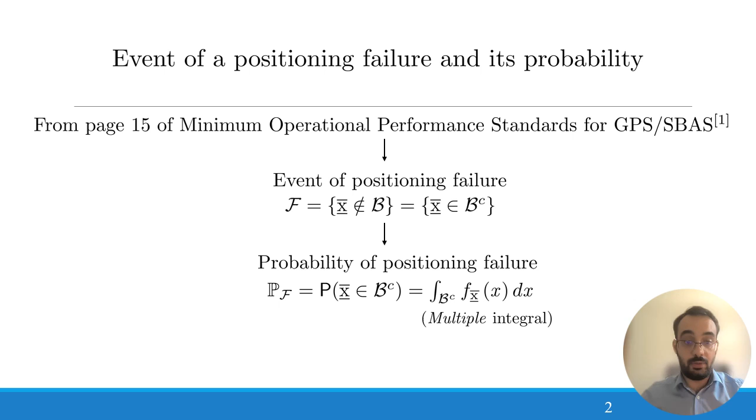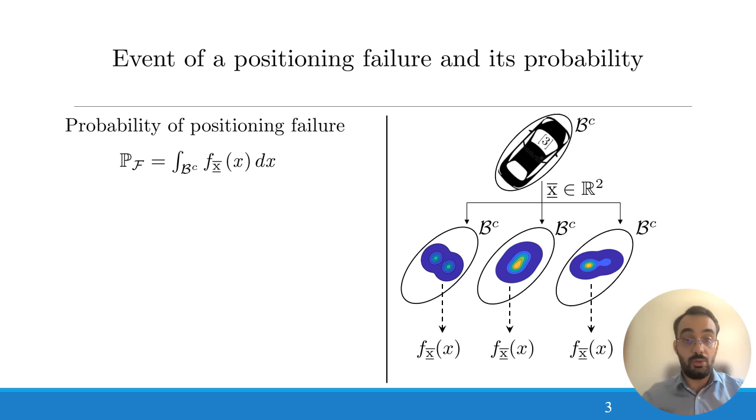On the right side, we have an illustration showing what shapes the PDF of the position estimator could have in practice. If we relate the PDFs with a chosen shape of the safety region, we observe that each of the PDF contributes differently to the probability of positioning failure.

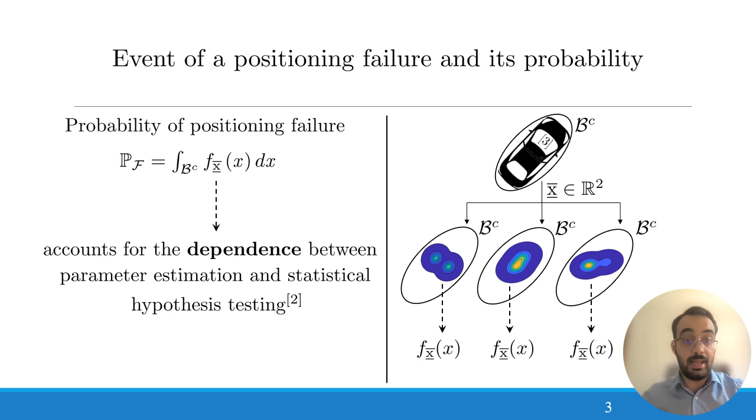Although the PDFs are clearly non-normal, they are actually capturing the dependence between two statistical inference concepts often used in positioning algorithms, such as parameter estimation and statistical hypothesis testing procedures for model misspecifications such as outliers or faults in the measurements that are used for positioning. Today's discussion will cover the principles of this dependence, which should be accounted for, especially in the context of positioning safety analysis. Neglecting this dependence may lead to unrepresentative results.

Therefore, we are going to cover three main points. The first one is about the principles of what we call the detection, identification, and adaptation estimator and its PDF. This is related to the aforementioned dependence. The second one is about the probability of positioning failure and its components. And lastly, a GNSS-based positioning safety analysis for an automated vehicle to illustrate the presented principles.

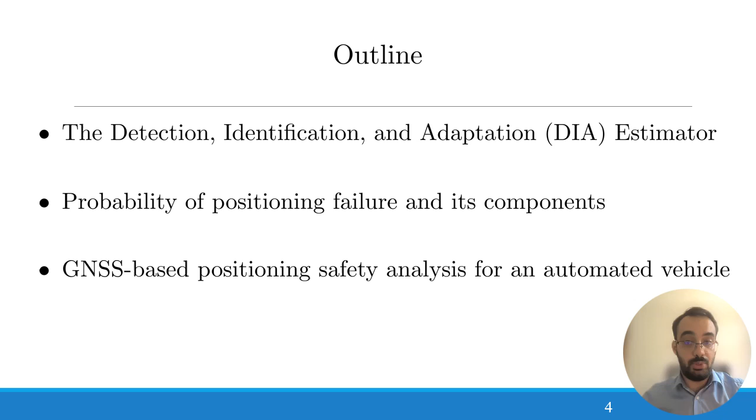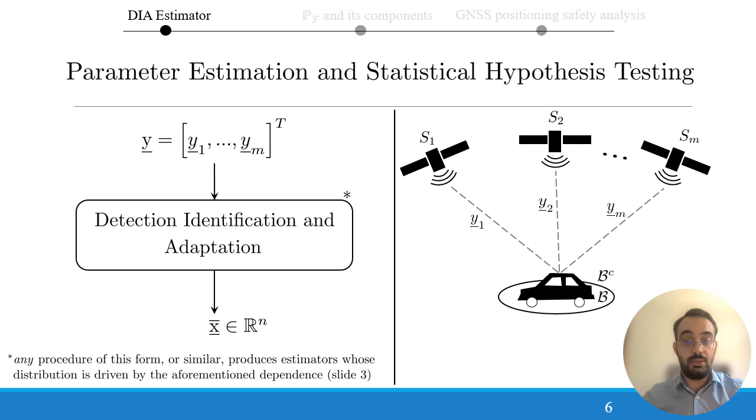We formulate the multiple hypothesis testing problem to account for the underparameterization of the mean of the observation vector. A is the design matrix and X is the to be estimated parameter vector, such as the position vector. Under the null hypothesis, we obtain the estimator based on the nominal functional model.

In practice, outliers or faults occur, so we need to account for this by extending the functional model. In the extended models, under the alternative hypothesis, the CI matrix represents the signature of the outliers or faults, which can be single or multiple. And BI is the size of these outliers under each of the hypotheses. We have k such alternative hypotheses, each with an associated estimator. A question arises. What should the decision rule be for selecting the most likely hypothesis and therefore the associated estimator?

For now, let's use an analogy involving levers. We accept H0 if the green lever is in the left setting and provide x hat 0 as output. If the green lever is in the right setting, we reject H0. However, this does not indicate which of the alternative hypotheses HI is most likely. To identify the most likely alternative hypothesis, we consider the one for which the blue lever is in the left setting. In this case, x hat i is provided as an output.

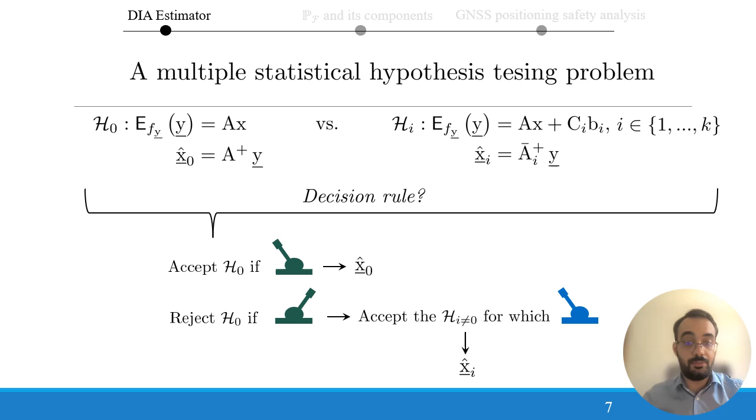To strengthen this intuition, we illustrate the outcome of the lever analogy with the help of an example. Let us assume that H1 is true. Now let's see what could be a probable outcome at the end of the procedure given the decisions based on the setting of the levers by following the red dot. H0 is accepted, so the green lever is in the left position. In this case, a misdetection occurs and the estimator under H0 is provided as an output.

Now we can ask the following question. Are there any other probable outcomes? The answer is yes.

A different probable outcome could be when H0 is rejected and the wrong identification occurs. In this situation, the estimator under H3 is provided as an output.

Another different probable outcome could be when H0 is rejected and the correct identification occurs. Now the estimator under H1 is provided as an output.

In this particular example, it would be incorrect to consider only x hat 1 and its PDF for safety analysis, without taking into account the other probable outcomes that could happen under H1.

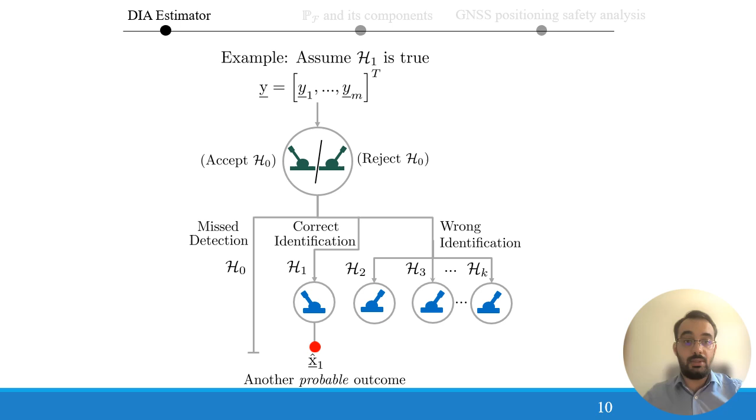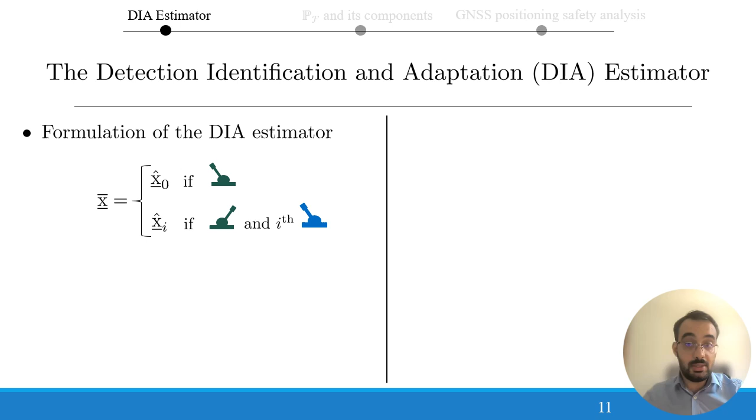What should we do then, given that considering only the individual estimators at the output of the DIA procedure is incorrect? We need to formulate an estimator which captures the effect of the decisions as an outcome of the settings of the levers. This is the DIA estimator. Its PDF accounts for the dependence between parameter estimation and statistical hypothesis testing.

But now one may ask, well, okay, but what exactly are these levers and what governs their setting? The test statistics are the levers, which are constructed based on the misclosure vectors, while the setting of the lever is governed by where the misclosure vector lands in its partition vector space, denoted with calligraphic V's.

The main idea is that we can map the multiple statistical hypothesis testing problem as a partitioning problem of the vector space of the misclosures. For example, if the misclosure vector lands in partition 1, then we select H1 as the most likely hypothesis and provide x hat 1 as an output.

These partitions are also needed to construct the PDF of the DIA estimator, as we need to integrate over them. For more details, we refer to our paper on how to obtain the misclosure vector and how to formulate the partitions via several examples.

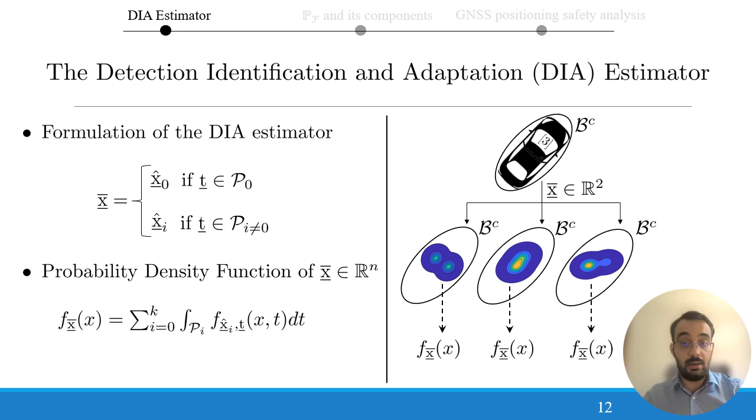Hopefully, by this point, we have developed some intuition for the DIA estimator and understanding about what its PDF must account for. The next step is to discuss the probability of positioning failure with particular emphasis on its components.

We have made a small change in notation of the probability of positioning failure. The bolded B represents a set that contains the sizes of the model outliers under all alternative hypotheses.

Now, how should we proceed with the decomposition? Since we are dealing with multiple hypotheses, we can apply the rule of total probability to obtain the following result. We have obtained the components under each hypothesis weighted by the a priori probabilities of occurrence of the hypothesis. This can be useful for investigating the components at a per hypothesis level.

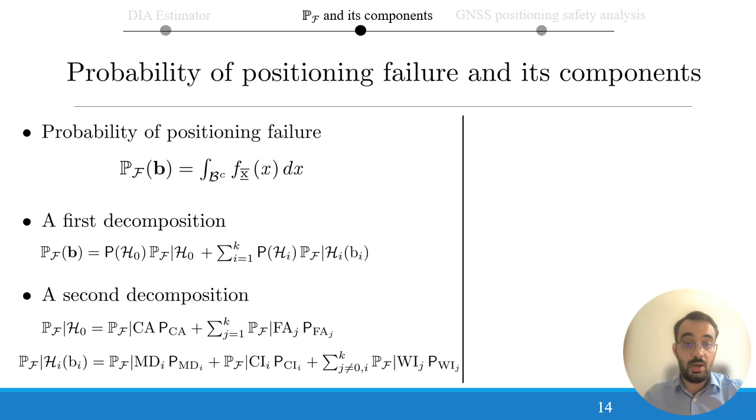We can go a step further and apply a second decomposition to the components under H0 and HI. Doing so, we have access to the conditional components related to the statistical hypothesis testing decisions such as correct acceptance, false alarm, misdetection, correct identification, and wrong identification. There is a legend on the right regarding the events or testing decisions under H0 and HI.

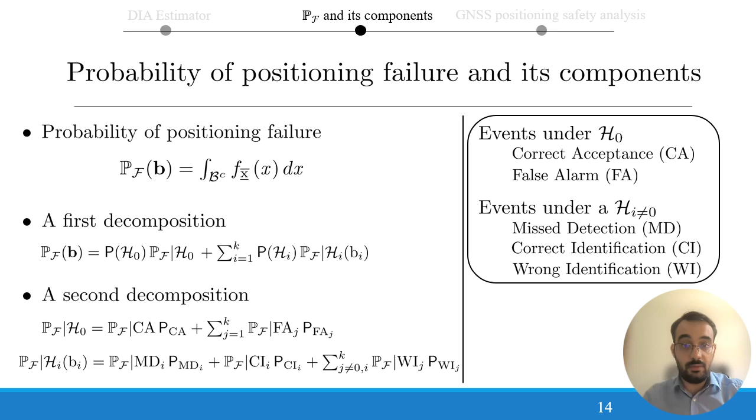We can arrange the result of the decomposition in a graph for a better visualization. In this illustration, we see the branch corresponding to the null hypothesis. Similarly for hypothesis 1 until hypothesis K. Now that we have a complete picture of these components of the probability of positioning failure, you might wonder,

What should we do with it? Our answer is simple: build it from the ground up.

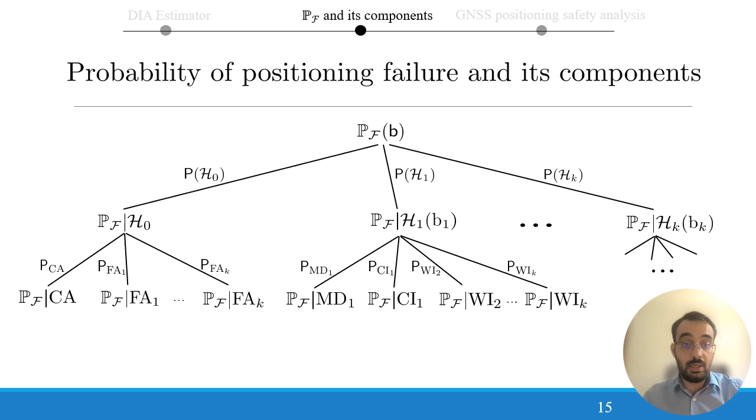And that's exactly what we'll do in the context of a GNSS-based positioning safety analysis for an automated vehicle. We selected the dual constellation setup utilizing GPS and Galileo and a differential GNSS positioning model to achieve decimeter level accuracy. Our goal in this scenario was a 95% two-dimensional circular error probable of half a meter.

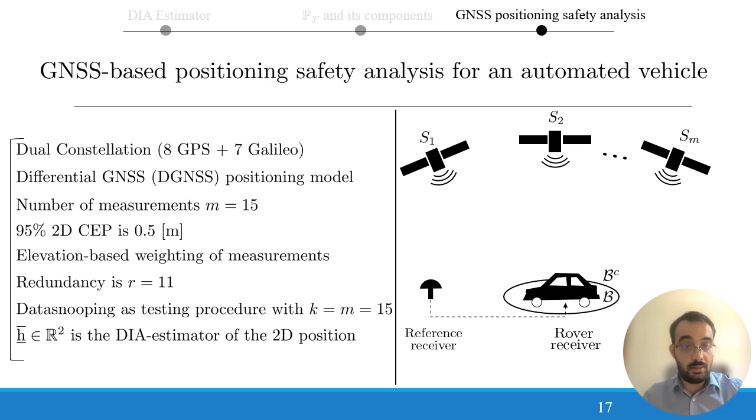The redundancy is 11 and the testing procedure is data snooping, so we assume only one model outlier at a time. In this case, we have 15 alternative hypotheses. Our focus is on the horizontal position, with the DIA estimator being denoted here with H bar. If needed, the 3D position can also be selected.

On the left, we have the satellite sky plot showing 8 GPS satellites and 7 Galileo satellites. They are depicted as alternative hypotheses. On the right, the dimensions of the car are shown, along with an elliptical safety region. Other shapes, such as rectangle, can also be chosen.

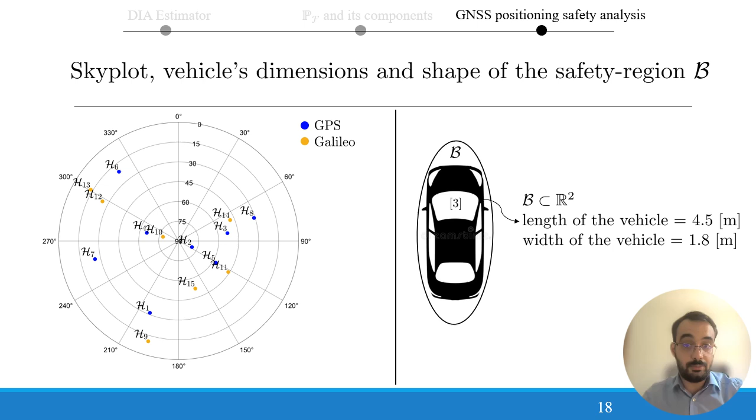Next, we are going to look at what the PDF of the two-dimensional DIA estimator looks like under an alternative hypothesis. As an example, we have the conditional PDFs under hypothesis 10. For a given size of the model outlier, this is how the conditional PDFs look like under the events of misdetection (MD), wrong identification (WI), and correct identification (CI).

If we relate the shape, size, and orientation of these conditional PDFs with a safety region around the vehicle, we can clearly see that some components will have more probability density outside the safety region than others. In other words, some statistical testing decisions will hurt more than others.

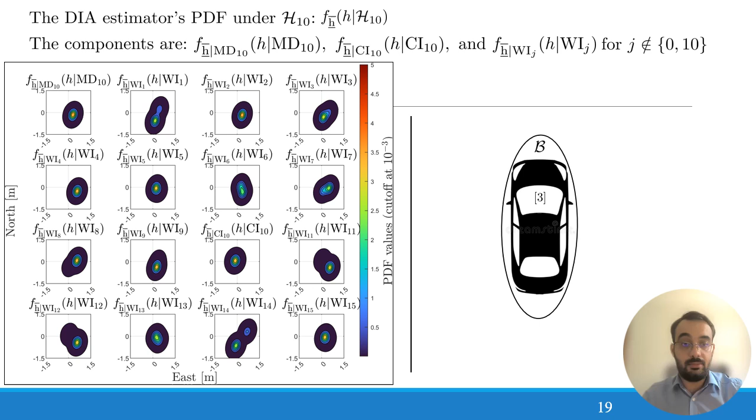Earlier, we said that we would like to build this graph from the ground up. As an example, we show the results corresponding to the branch of hypothesis 10.

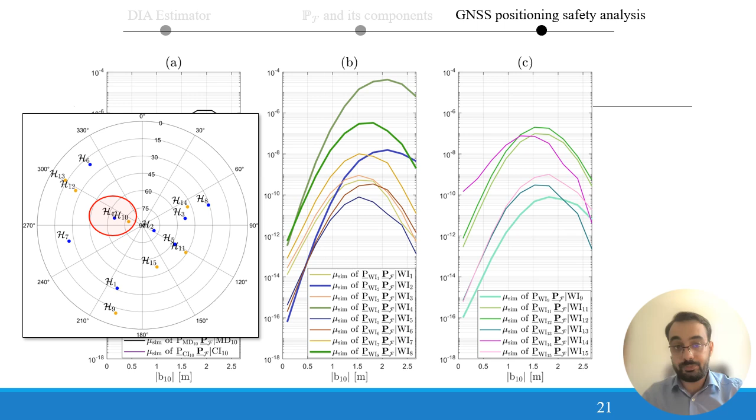By summing these components, we obtain the probability of positioning failure under H10. Similarly, this is done for all the other hypotheses, which we are going to see in the next slide.

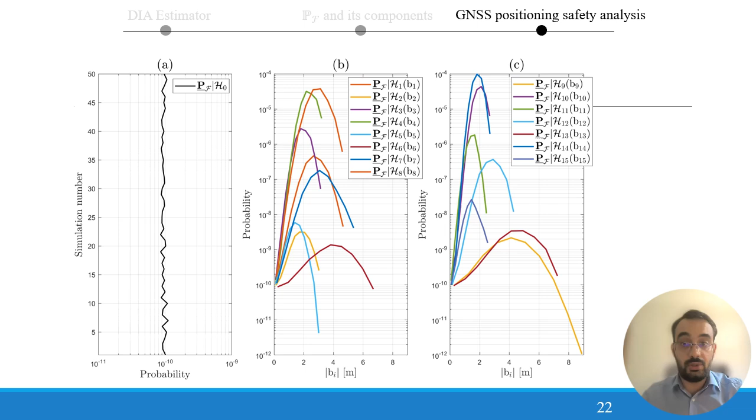These three graphs show the full picture on the probabilities of positioning failure under each of the hypotheses. We observe that the components under hypothesis 4 and 8 from the graph in the middle are the dominant ones, while the components under 10 and 14 are the dominant ones in the graph on the right.

The PDFs of the DIA estimator under each of these hypotheses, H4, H8, H10, and H14, have the largest variations of their probability density on the east direction, which for the chosen shape of the safety region will lead to the largest probabilities.

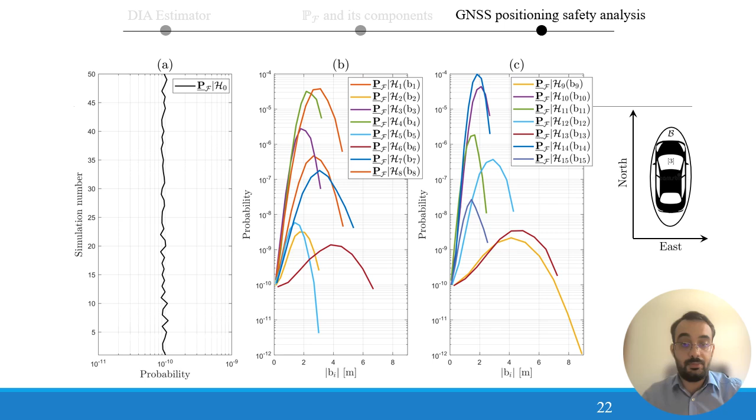We have constructed a graph up until the components under each of the hypotheses. In the next step, we will make some assumptions on the a priori probabilities of occurrence of the hypothesis to obtain the total probability of positioning failure.

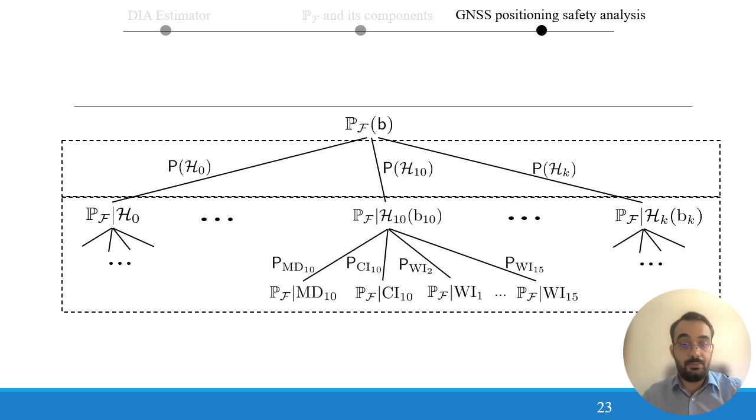We selected three cases, ranging from conservative to more optimistic scenarios. In case 1, we assume that an outlier occurs with a probability of 10-3 per satellite. In case 2, we assume that an outlier occurs with a probability of 10-4 per satellite. And in case 3, we assume that an outlier occurs with a probability of 10-5 per satellite.

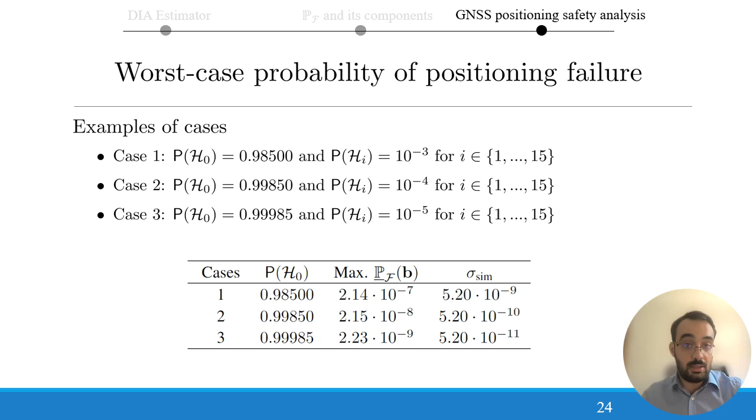Using these assumptions and the previous results, we obtain the following table with the maximum probability of positioning failure for each of the three cases. We see that the maximum varies across the cases from 10-7 to 10-9.

We can use the maximum values as key safety indicators to verify compliance with respect to requirements, if we have them. These results correspond to a single time instant, or snapshot.

For example, if the vehicle changes its orientation, then the results from the table will also change. We refer to the paper for the results related to the maximum probability of positioning failure as a function of the vehicle's orientation.

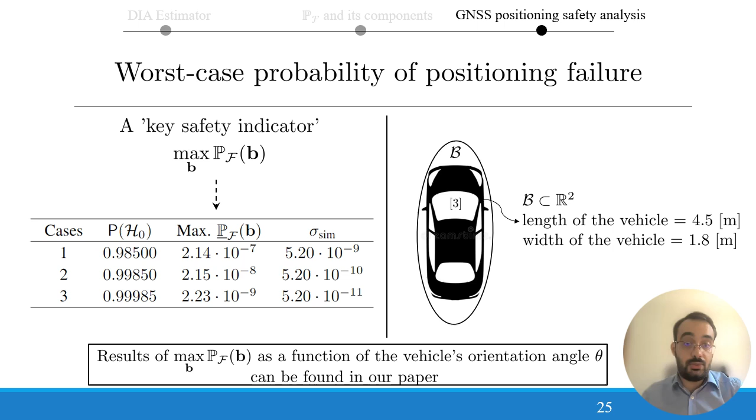At this stage, we can address a practical question. In what context would positioning safety analysis based on the probability of positioning failure be applicable? For this type of analysis, we rely on numerical simulation methods to compute the multiple integrals.

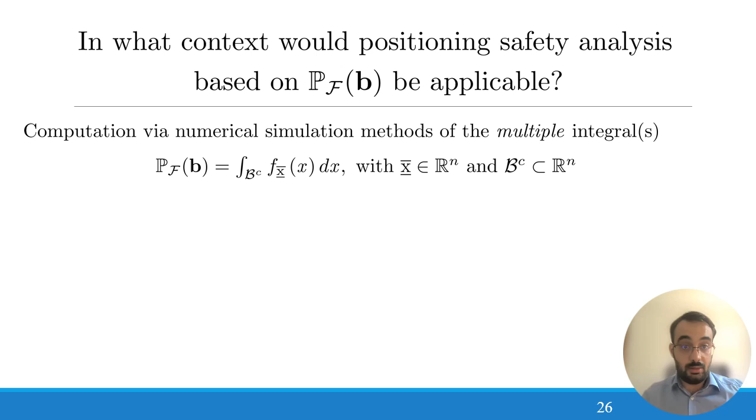Using numerical simulation methods aligns with a scenario-based safety assessment framework that is commonly used for automated and autonomous vehicle safety studies. For example, this applies to perception, planning, and control functions.

But where does such a framework fit within our context, particularly from a positioning perspective? A potential fit would be in the design stage of the positioning algorithms and our system. Let us see how this would work in practice.

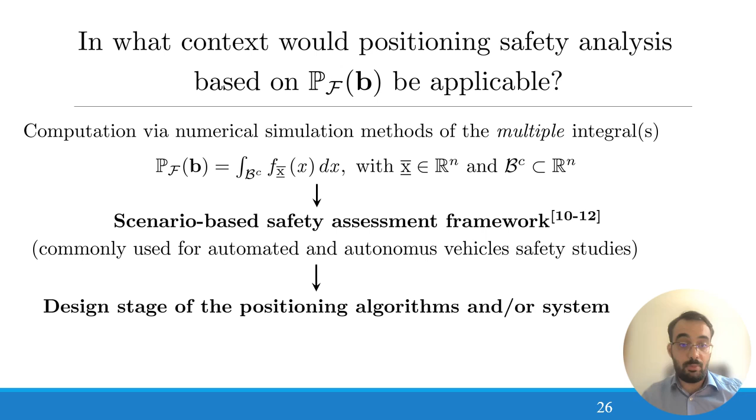In the design stage, we make choices regarding measurement models, parameter estimation algorithms, statistical hypothesis testing procedures, positioning scenarios for vehicles, etc. Based on these choices, we carry out the positioning safety analysis by computing the probability of positioning failure.

If compliance with respect to the requirements is not achieved, then we go back to the design stage. Once we achieve compliance, the resulting algorithms can be implemented for real-time positioning.

Of course, in this simulation-based framework, the results also depend on the scenario. For example, if we demonstrate that we achieve compliance in the context of a scenario, it does not mean it will be true for different scenarios.

But this can be good news because it opens connections with the safety studies for other functions of an automated vehicle, such as perception, planning, and control, which use a scenario-based approach.

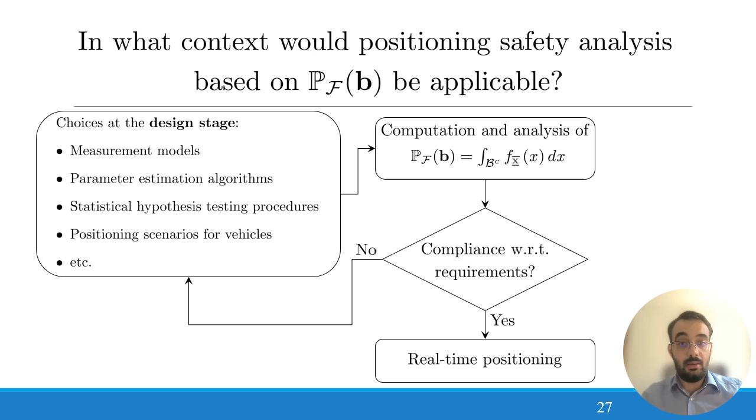In today's talk, we have presented the formulation of the probability of positioning failure, the principles of the dependence between parameter estimation and statistical hypothesis testing via the DIA estimator and its PDF, and carried out a GNSS-based positioning safety analysis using the discussed principles.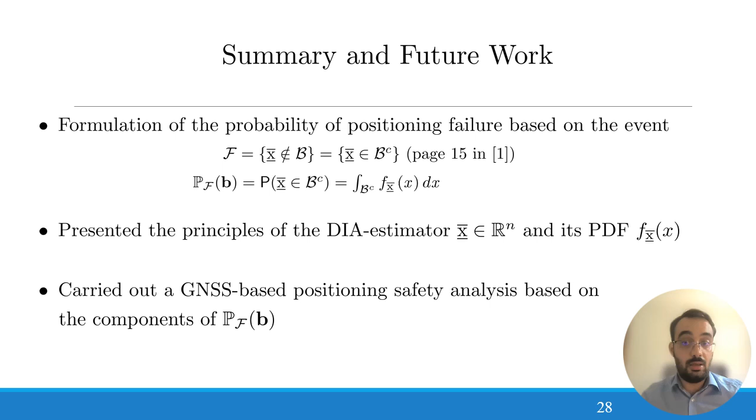A topic for future work is the quantification of the probability of positioning failure over a time horizon - seconds, minutes, hours - to capture time-dependent effects such as time-correlated measurements, time-dependent model misspecifications, variation in satellite geometry, etc.